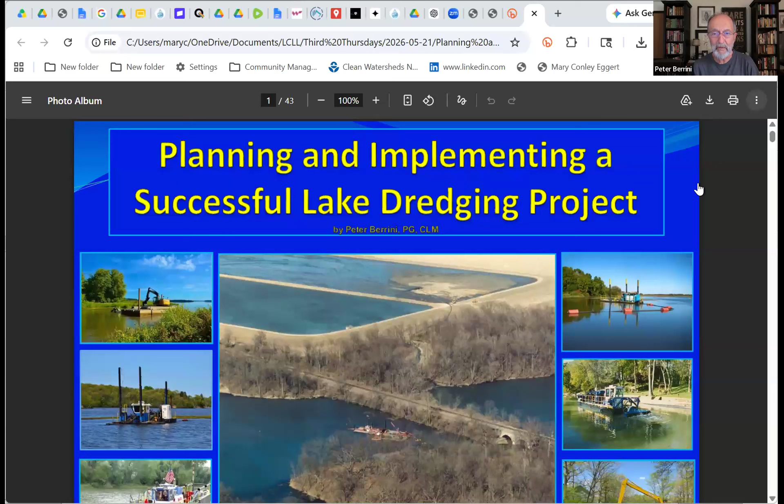This version, planning and implementing a successful lake dredging project, really was—I made a lot of updates for this year's ILMA conference because they agreed to let me speak for an hour instead of the usual half hour.

So I was able to pack more information in, just looking at the various photos. The center picture is from Paris, Illinois. It was a water supply lake—a hugely successful project, and the location of the sediment storage and dewatering facility was absolutely ideal. So everything turned out great.

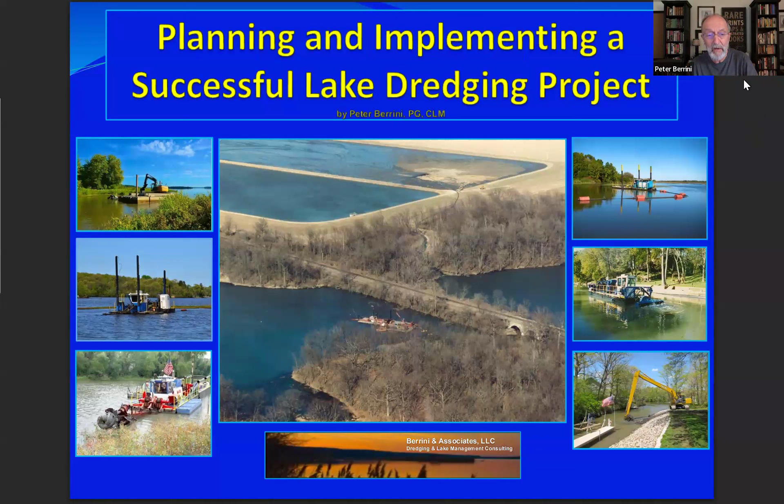There's a couple of examples of different dredges. Go ahead to the next slide.

Trying to breeze through some of this and minimize some of the narrative and text. A lot of this information I have to put qualifiers on—it's not only from lessons learned from involvement in actual projects, but constantly researching any and every situation that could possibly come up, all the way down to the smallest dredging project. Everyone needs specific attention.

Next slide. Sometimes it's easy to tell that dredging is needed. You might see a delta forming, as in the upper right photo. Low water levels might expose all kinds of sediment that you might not have been aware of, other than your boat propeller hitting it. Or you might see very brown, turbid water being agitated by your boat propeller, or an island maybe forming at a creek mouth.

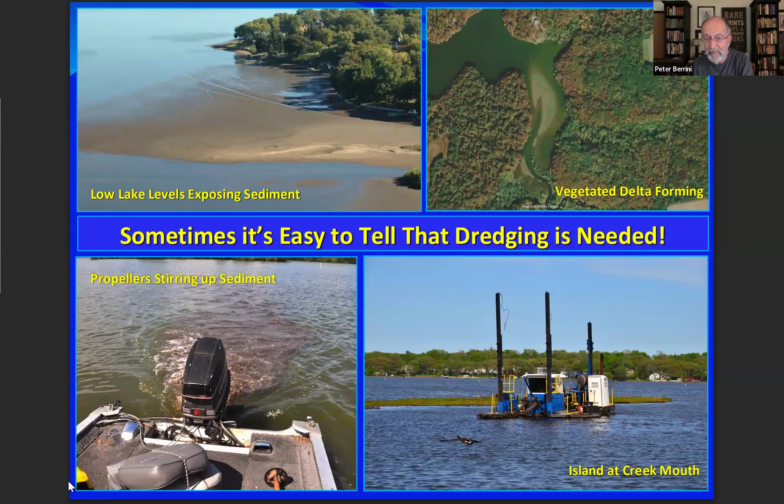Next slide. Those are just the obvious signs. So I felt it was important to create somewhat of a basic flow chart: Hey, we think our lake needs dredging. What do we do now?

You would go through a couple of choices. Let's do a survey so we know what's there—where are the problem areas, what's the sediment like, if we dredge where do we put it, how much will it cost, which is the best method?

Mechanical or hydraulic, which are predictable removal methods, versus—I will talk a little bit about bio-augmentation options in a couple of slides later, but that's not my main focus.

Usually it's for navigation impacts, loss of water depth, which is critical. But what regulatory permits will be required? That's going to be based on what method of dredging you choose. If you hydraulically dredge, you need to approach it a certain way as far as permits go.

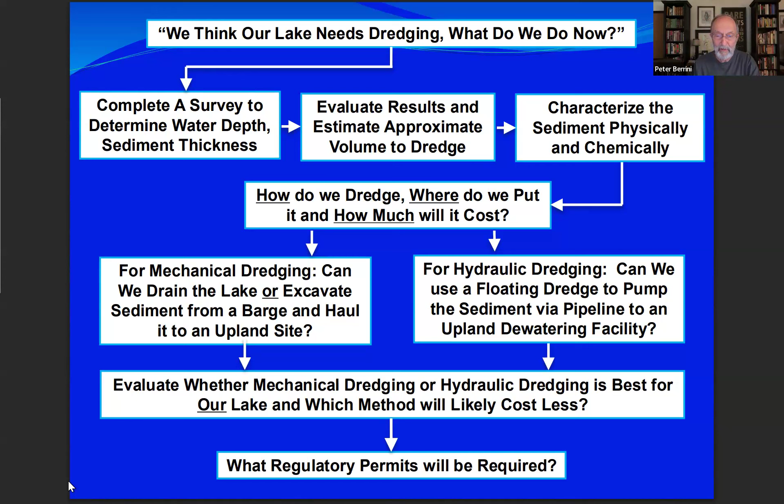So it's very important to gather the right information to make these planning decisions. It's very expensive—we want to do it right, let's make sure we've got the information.

What areas are impaired, in terms of access, water quality, etc.? How much sediment has accumulated? What are the physical and chemical characteristics? We need to sample the cores and analyze them. How many cubic yards, how do we remove it, what method is best, what size and type of equipment is most suitable?

There are so many options out there as far as equipment and methods. Where can we put it? How much is it going to cost? How do we pay? All these questions.

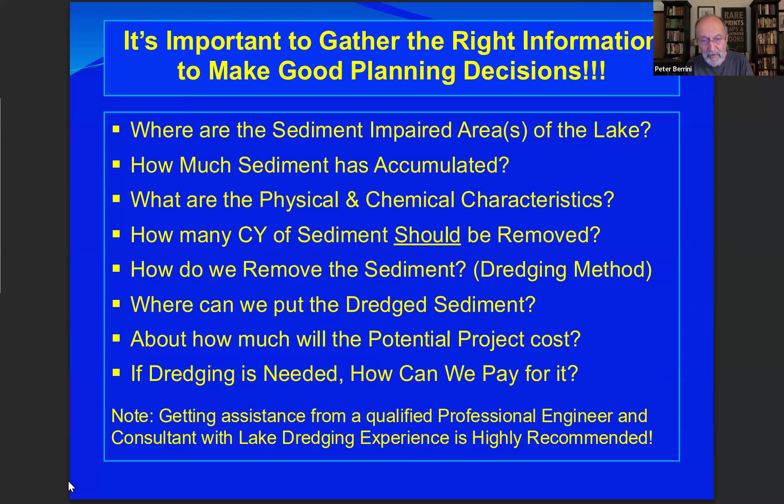In a lot of cases, although I'm not a professional engineer—I'm a geologist—I always had a professional engineer on staff, because certain permits require a PE stamp. Lately, in the last 5 years, I've been more focused on helping a local engineer with a PE to execute the project by giving them proper design and permitting guidance and how they should approach it. It's worked out quite well.

Considerations: once we determine these dredging limits and quantities, and a placement site is secured—and you'll never catch me using the word 'disposal,' other than right now to qualify.

We have to have plan drawings to clearly show a contractor what we want, or a regulatory permitting agency what we propose, and how we're going to comply with environmental regulations.

Bid specifications are hugely important to not only spell out clearly what the contractor is supposed to do, how it's going to be measured, how it's going to be paid for, to eliminate problems during the project as much as possible.

A post-dredge survey is critical. Once you do the pre-dredge survey and you dredge, it's oftentimes very important to do this always, because it's underwater—even though the dredger thinks they've dredged there, they may not have reached the levels that were proposed. So in order to get the quality job with the results you want, you've got to verify it. Next slide.

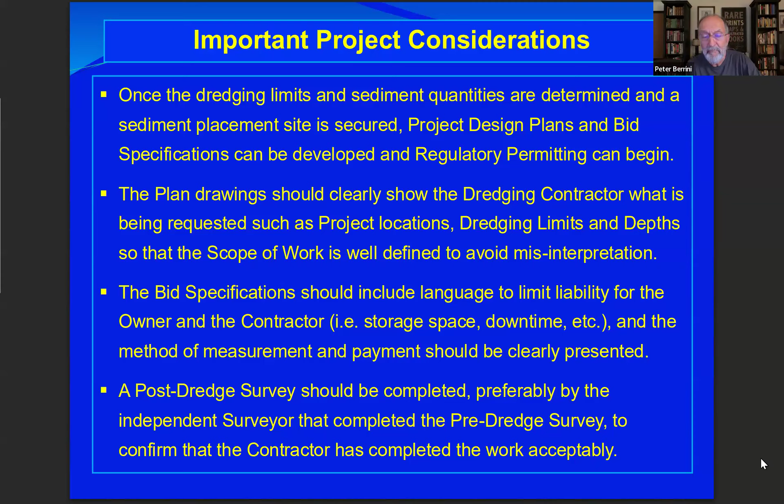And permitting requirements in Illinois are... next slide.

Rather than reading through every one, there's a process of going through the local Corps of Engineers regional office, but copies would always go to Illinois EPA and Illinois DNR. It's the Corps who determines whether a permit is needed, and what type.

If it's a hydraulic dredging project, there would be effluent water returning, and right away you need a specific EPA permit. If you need to store the sediment in an earthen impoundment, it could be a permitted dam, so an Illinois DNR dam permit may be required.

If you need, for instance, an NPDES permit because you're disturbing more than 1 acre of upland ground to put the sediment, here's another case where a PE, professional engineer, is required.

Although I'm not actively bidding projects, I do construction monitoring by helping various engineering firms, some located in northeastern Illinois, et cetera, and Wisconsin. It's been very helpful for them to avoid pitfalls they're not familiar with. So that's been a good thing.

It's limited how much time I have to spend, and it helps to make a successful project. But in many cases a professional engineer is needed, and many are not necessarily very savvy with dredging. Certain firms are, and many more are getting familiar.

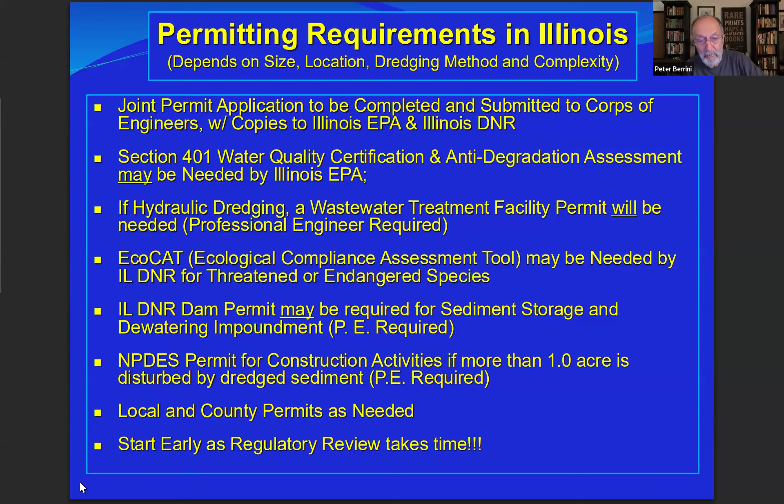Start early, because the regulatory process can really be time consuming and take longer than you would hope.

Some of the benefits: you could get increased water depths and storage capacity that's lost to sediment deposition. You can improve and expand your recreational opportunities, safe boating and navigational access. You can also expand and improve your aquatic habitat conditions for fish and other aquatic life.

Improved water clarity and quality can occur also from reduced internal sediment and nutrient recycling from physical resuspension, which pulses phosphorus back into the water column.

If you had an extreme storm event, like we've had many of this spring, at least down here and up north, that can really agitate the bottom sediment and resuspend and remobilize phosphorus. So dredging can really help to reduce that.

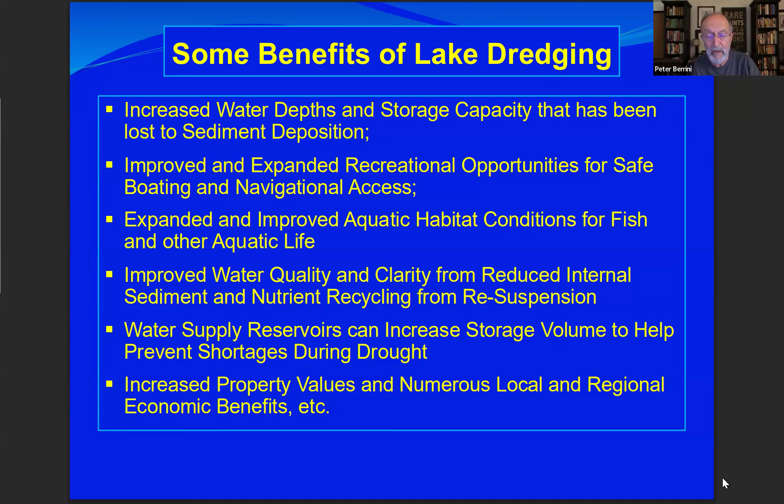For water supply reservoirs, it can be critical to increase the storage volume to prevent shortages during a drought, for instance. This has been proven by a really great study done at Delavan Lake in Wisconsin, which I've done work with for almost 20 years now. They've found increased property values and local and regional economic benefits, et cetera, as a result of a properly implemented project.

A sedimentation survey is absolutely critical. Beyond just getting a hydrographic or bathymetric survey, which only tells you the water depths, it's critical to know not only how deep the water is, but how thick the bottom sediment is.

As you see in this example, I like the more transects the better, the more points where you measure depth, the better. The more closely those point intervals are, the greater the accuracy. The bottom line is, if you need to assess the lake, going across it in a series of strategically located lines or transects can show you that at this location it's, say, 8.8 feet.

And the hard bottom underneath the soft sediment is 10.6 feet. If you had 2 feet of sediment in a very shallow portion of the lake, only 1 or 2 feet deep, that 2 feet of sediment has a much greater impact on your access and water quality conditions. So it's very important to know not only how deep the water is, but how thick the sediment is.

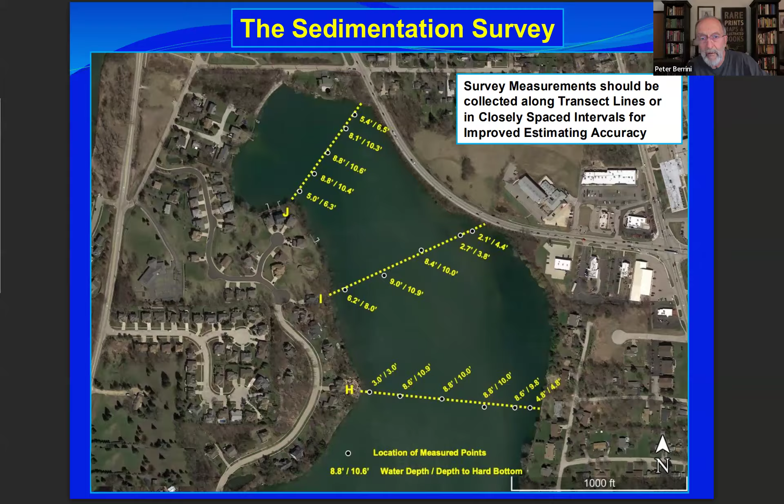Another version that a different company has done, which I really like: you can view different contour lines showing existing water depth down to the top of the sediment, and different colors and numbers showing sediment thickness. In this example, there's an area that's orange with lots of sediment - it may have been a deeper hole where sediment collected. Overall, it gives you an idea of how the sediment is distributed.

If I'm in water shallower than 8 feet, I start to take a closer look. If I see 2 or 3 feet of sediment widespread in an area less than 5 feet deep, that raises flags, and I focus on those as priority areas to attend to most prominently. That's why these sediment surveys are so important.

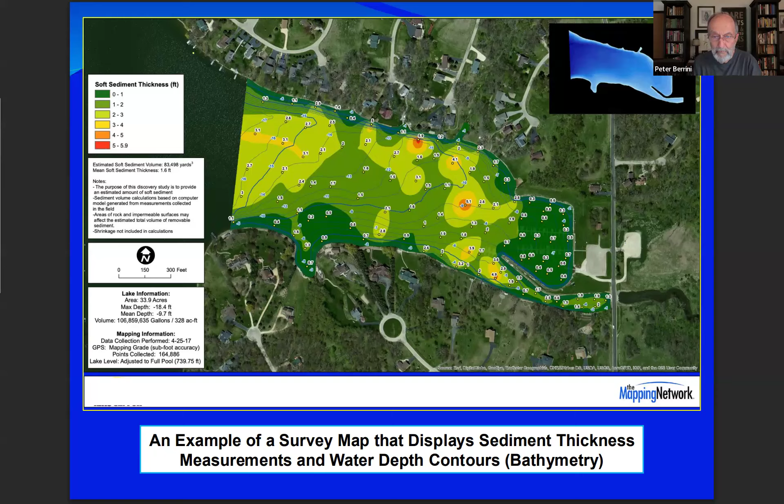Same one. Let's see, there you go. And there's different measuring tools.

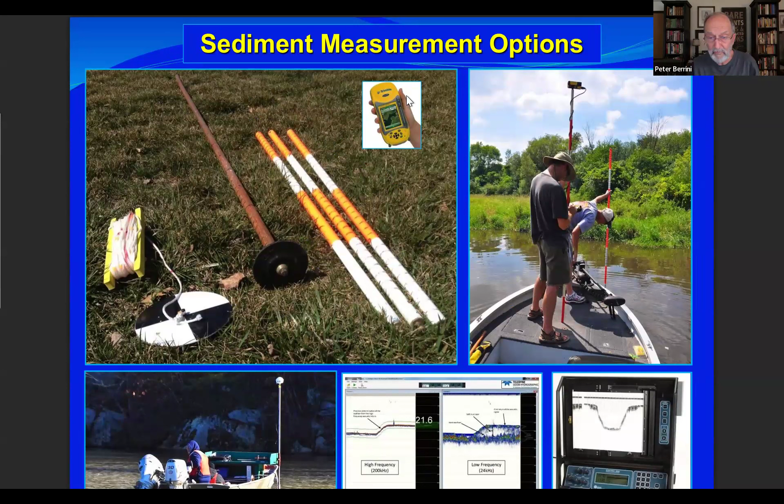I've always found a pole that you could push, that had markings, useful to push down through the sediment. I love having a pole with a disc at the end because it gives a much more accurate measurement. Oftentimes in lakes, I'll throw out there, such as Butler Lake, which has very loose, organically enriched sediment, a simple pole with no disc at the end makes it very difficult to get an accurate measurement because you can't feel the sediment in the upper 6 inches until you get some gradual resistance.

There are other methods. Obviously you've got to use a GPS system. Boats who do this regularly could be using a calibrated sonar unit that tells them depth, but it's ultra critical, in my opinion, to calibrate those measurements by pushing a pole down through the soft sediment. There are areas in Lake County where there's peat at the bottom and a pole may not hit a hard bottom, and then you have to decide what's best for that situation, like targeting a maximum dredging cut depth, for instance. But using GPS, whether handheld in a boat or running lines back and forth, can easily give you water depth or bathymetry.

Dual frequency fathometers have made claims. I've tried to use them and had very mixed results. It's very important, I think, to take at least some measurements using a pole that has markings, so when you push it down and feel a hard bottom, you record that measurement and can know how deep it is and how much sediment is there. The easy way out using this dual frequency method has not panned out, in my opinion. It's very inaccurate. I really think you've got to measure, and in most cases you're not having to do this in water greater than 10 feet deep because it's not really as much of a problem worth getting stressed out over.

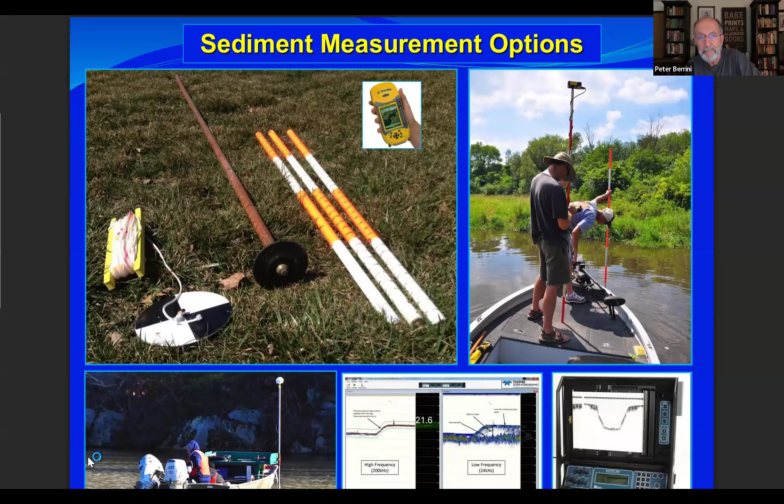So a cross section, back up. Next, this is just one slide. These are typical lake sections. When you measure these points going across the lake back and forth, you can target a transect and create this profile view, this cross-sectional view.

It's extremely important because not only does it allow easy calculation of volumes, but it visually can show the non-scientist lake person how the sediment might be impacting them. If you look at this bottom section, for instance, the hard bottom is just barely 6 feet deep, and there's 2 to 3 feet of sediment. So the existing water depth in this case is only 2 or 3 feet deep. So that 2 or 3 feet of sediment in relation to the top, which is 9 feet deep, is not maybe quite as great. And dredging is expensive per cubic yard.

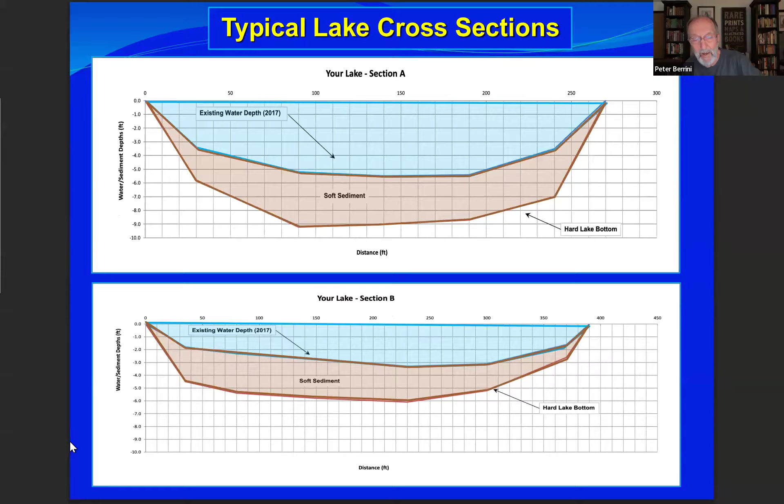That's why it's ultra critical to know this: where should I prioritize my dredging areas, depths, and limits? So the cross section to me is like a must, it's like the Bible of dredging. Go on, next slide. Sorry, there's a slight delay here. Yeah, these are basic slides, I can talk about them if anyone asks.

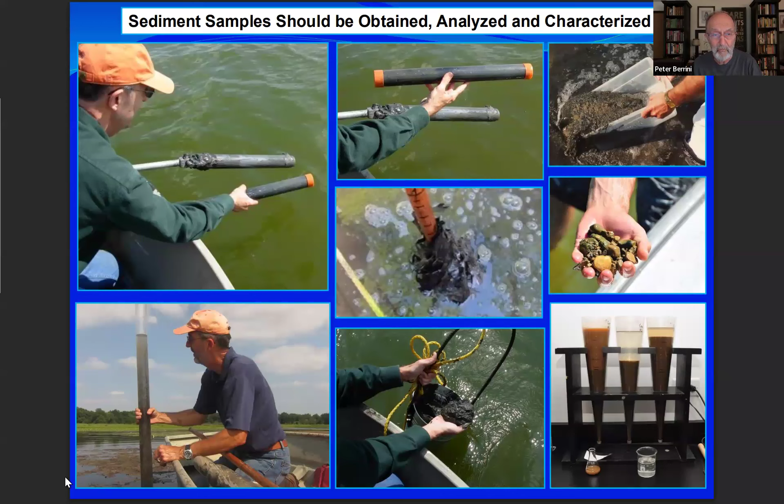Core samples, sediment samples, I think are extremely important, not just because Illinois EPA will likely require some if they are cognizant enough to read your permit. They're not known to be very quick, but they do have specific requirements. A core sampler that you push down into the sediment allows the sediment to be put into a tube, which you can see my right hand holding in the upper left-hand side. You can immediately cap it, put it in a cooler, ready to be sent to the lab. If you're hydraulic dredging, you would also be getting gallons of lake water because you have to mix it at a certain ratio and analyze it according to certain procedures.

But as you can see, there's different types of sediment. The upper right-hand column was from Third Lake, and that was primarily an algae biomass so thick from top to bottom, as much as 3 to 4 feet, very watery, 95% water, and it was hydraulically dredged, versus the slide below it, from Wonder Lake, where there was a lot of gravel and cobble present, which can be a real problem for the dredging depending on the method. The middle one, leaves may be a huge problem. Sediment may be super fine grained, which will cause the sediment to settle more slowly.

So it's very important to understand not just the chemical characteristics, like is it high in lead, for instance, or are there pesticides or PCBs? In most cases, no, but the physical characterization, in my opinion, is extremely critical in terms of meeting your permit requirements, knowing how to approach it, and designing your dredging methods, storage methods, and dewatering facility configurations. Next slide.

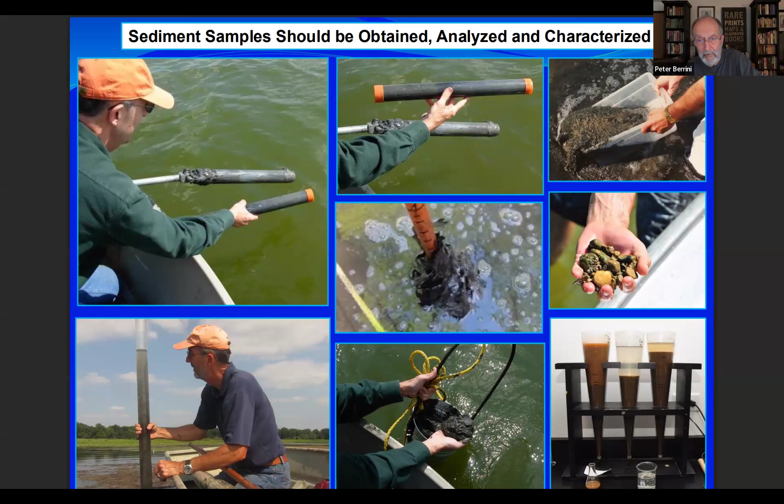Generally, I don't get to say this much about sediment, but it's extremely important in the planning process. This was actually pretty rapid.

The time span—if you mix sediment and water up, as EPA requires, 1 part sediment to 4 parts lake water, to simulate hydraulic dredging and discharge into a dewatering facility, not necessarily geotextile tubes, and then you measure the amount of time it takes to have most of the solids settle out. And if it doesn't settle out almost completely after 24 hours, you're probably going to have to use some type of flocculant to make the suspended particles settle out more quickly.

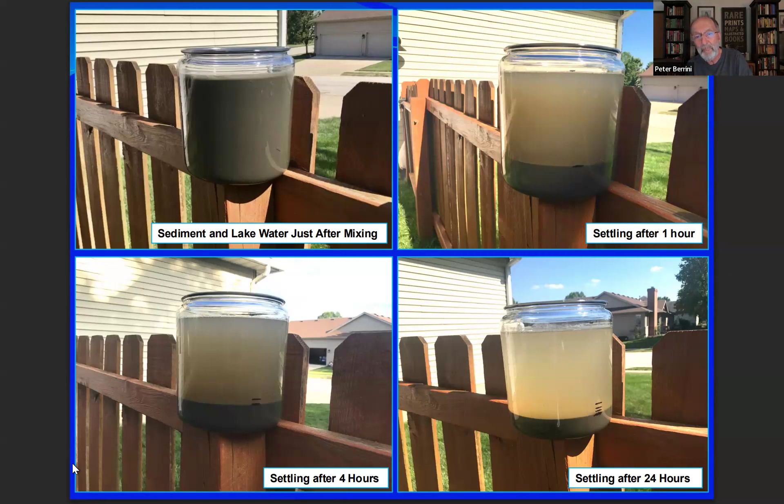So this is another part of the dredging Bible of permitting and design.

Obviously, if it's all sand, it's going to settle very quickly, and that makes life easier. But typically it's not—it's usually organically enriched with leaves and plant detritus, or silt and very fine-grained particles, so settling doesn't occur quickly.

Up in Lake County, space is at a premium. There's very little open space to store and dewater sediment in an open earthen impoundment, for instance, although I've had many up there that have worked out quite well. One of which, Third Lake, was on Forest Preserve property, which has since been graded back over and turned back into ecologically important habitat.

So if you have a large enough project, you may have to try and identify and secure an adequate upland storage location—a parcel of land that optimally would allow water to drain back to the lake, so that you're not just draining the lake and letting the water flow away somewhere else. It's best to have the water be able to return to the lake just by gravity flow.

Sometimes you have to create a map like this and investigate what possibilities are there before you even go and talk to the landowner about whether you could lease this land for 3 years, or whether it could be purchased, et cetera. In this particular case, the big rectangle in the upper right-hand side—the landowner agreed to allow them to use the land and restore it later.

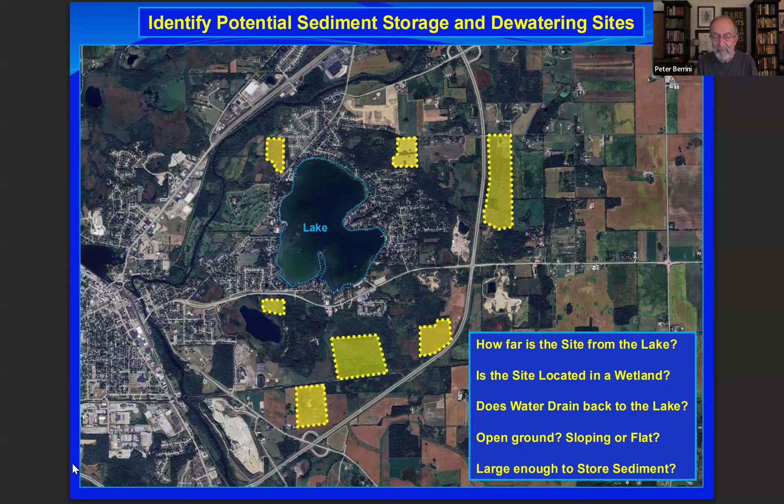So how far is it? How high is it? Is there a wetland on site? Does water drain back? All these criteria go into selecting the proper site to store all of your dredged material.

This is if it's a larger, more complex project, and you're trying to really evaluate each potential site—how far it is, how high it is. The further it is and the higher it is, like Wonder Lake in McHenry County, there were at least two booster pumps used on that project.

We had to pump sediment from the furthest location, up 95 feet higher than the lake, a distance of up to 3 miles. So you can get extreme—it was a pretty good sized project, 500,000 cubic yards total. There are pictures within here that show that from an aerial view, but it's just an example.

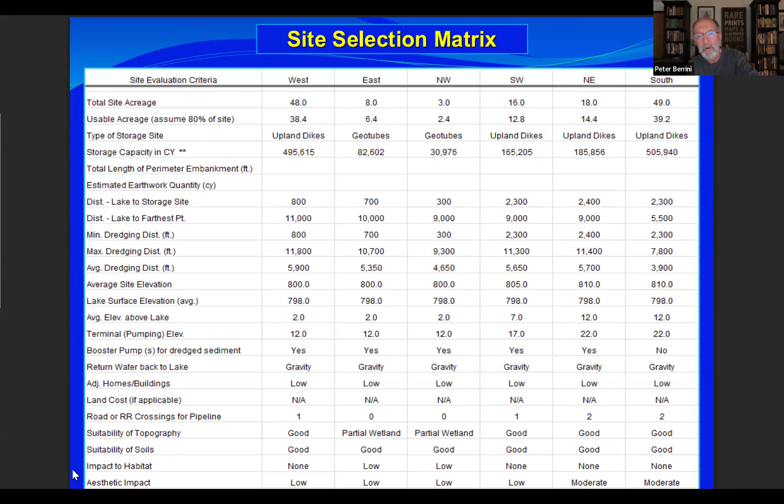This type of matrix can help in the planning. For a smaller project, probably not so critical. You're probably going to be really lucky to get a large enough piece of land to store the sediment on, and you may be forced into using geotextile tubes, which can use a smaller space.

Or, one project I had in Delavan, Wisconsin, there was literally no space, and we used the back of a fire station with what's called mechanical dewatering, using belt presses and centrifuges. So you're actively creating soil that could be hauled away on a daily basis, and that's a more expensive process. But when you don't have any land, like in Lake County, which is highly populated, open land is not readily available all the time.

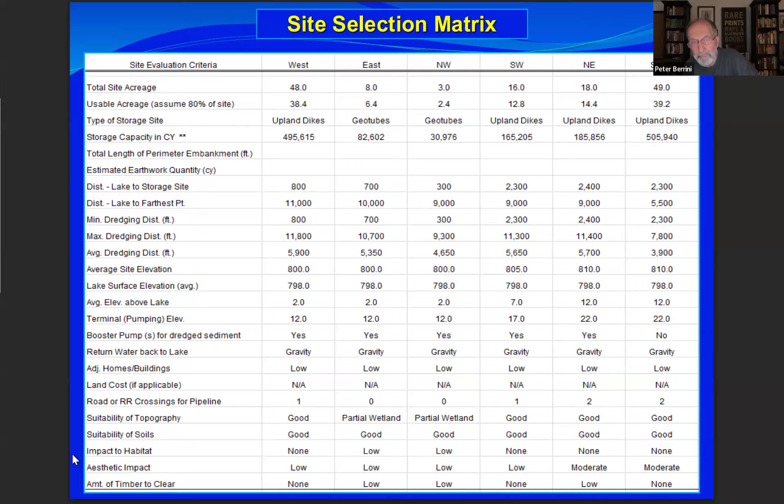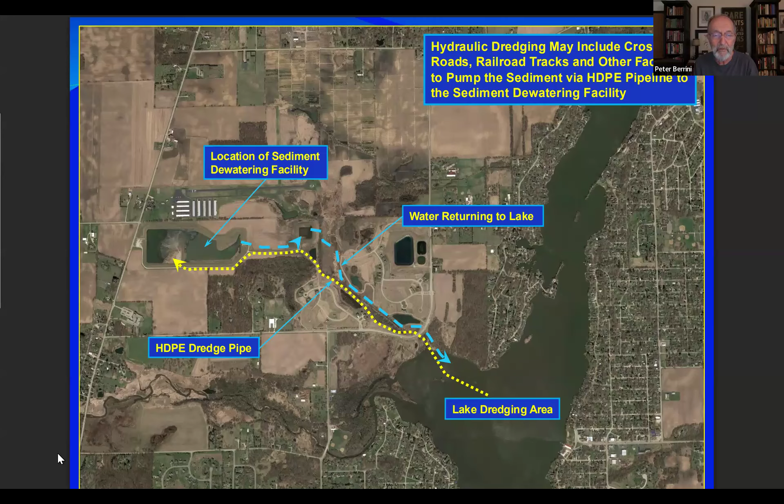So you've got to pump that sediment and water slurry all the way up and cross different obstacles like a road or a culvert. It had to go by various things to get there. And then the water would drain back to the lake, in the blue. That has to be sampled, and it has to be compliant with Illinois EPA regulations.

15 milligrams per liter of total suspended solids is what's required. You can cross railroad tracks, you might have to cross roads. At Butler Lake, that was the case. We had to cross through a railroad underpass, bike paths, etc. So you have to deal with this and look at the distance.

The distance and elevation you're pumping to will also dictate what type of dredge and how many booster pumps might be required, versus something a really good local firm uses, a very small dredge that might pump hundreds of feet into a geotextile tube for a small project. That's a different consideration. You could only pump so far, so 10 feet high and 1,000 feet far maybe, but anything further would be limiting for a 6-inch dredge, a Dino 6, or even a Truxor, very low, small cubic yards, maybe hundreds of cubic yards.

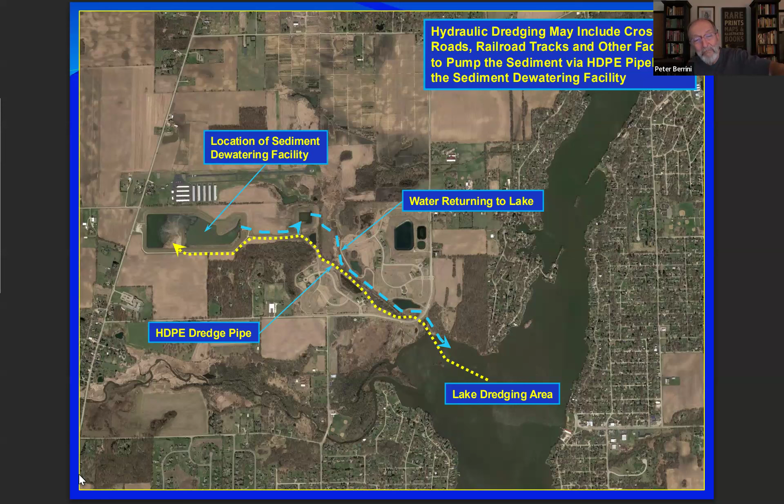This was 500,000, so you could use a larger dredge, and you needed that larger dredge to get it all that distance and all up that high.

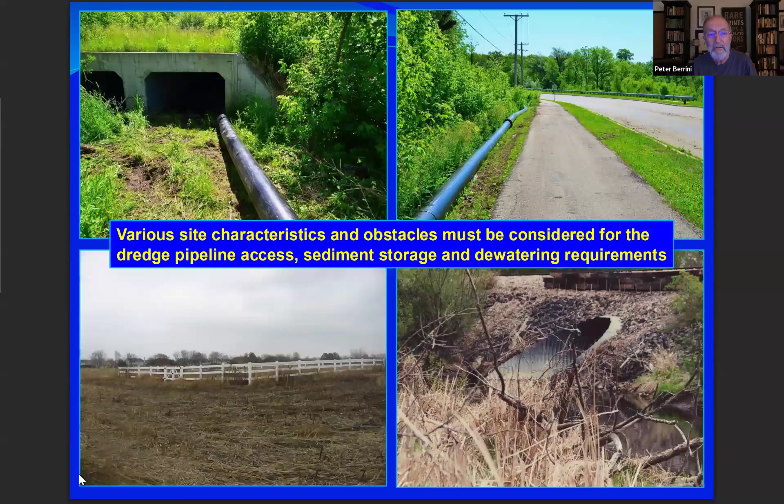You just have to consider all these things, and as an engineer, they're typically used to that, but they must be aware of it. In a way, I was also heavily targeting this PowerPoint - if an engineer who had never worked on a dredging project before was to undertake it, it would give them some more insight into how to avoid screwing up on the first project.

There's different methodologies and sizes. There might be hydraulic dredging using a larger rotating cutter head for much bigger projects, like Wonder Lake, for instance. For a smaller project where you're just dredging soft silt, you could use a horizontal auger dredge. It's like a snow blower or snow thrower working underwater, which could produce lower turbidity for very small projects.

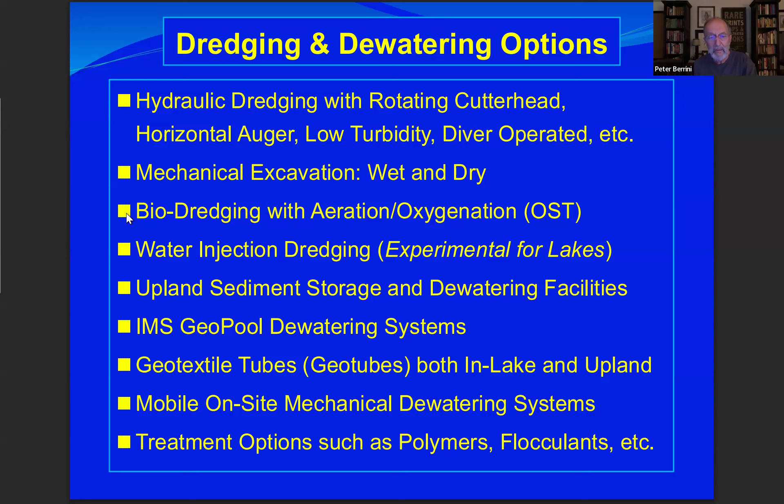Go ahead on the next slide. Different types of hydraulic dredges with rotating basket type cutter heads. Next slide.

There's auger dredges, horizontal. There are swinging ladder dredges for long, narrow canals, channels, etc.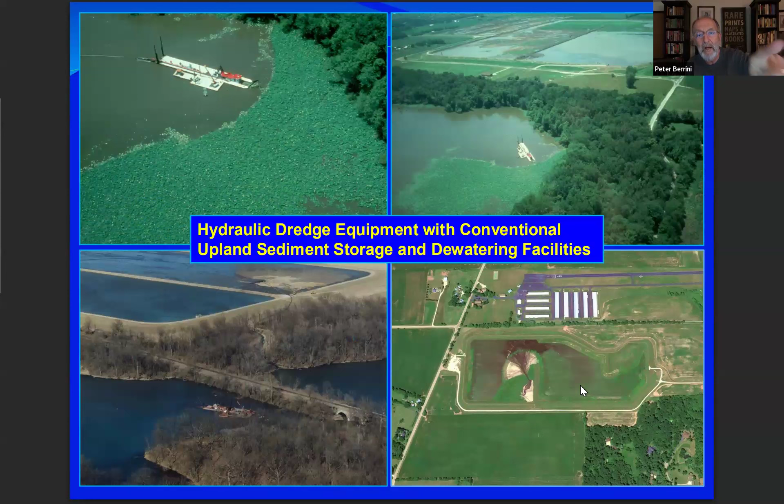So this is hydraulic dredging with conventional dewatering facilities. Lower right was the Wonder Lake project I mentioned. Upper left was Lake Springfield, and upper right shows how the large dredge swings back and forth as it cuts, with the dewatering impoundment in the background.

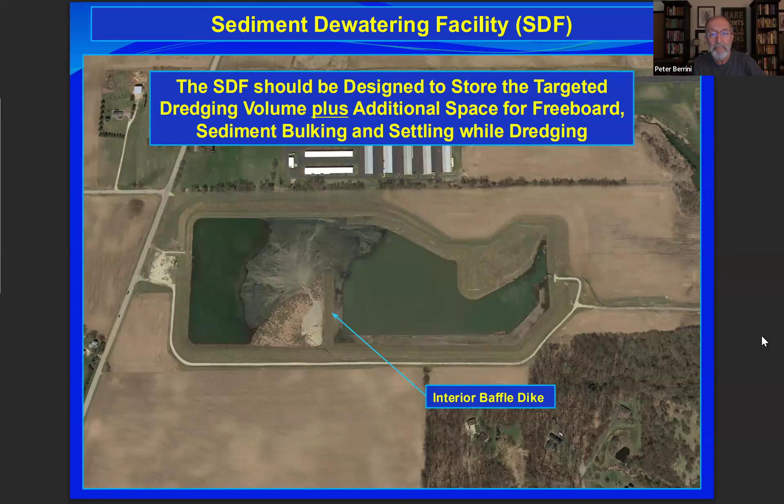Let's see if we can go through this. The sediment dewatering facility should be designed to store the targeted dredging volume, plus additional space for freeboard, sediment bulking, and settling while dredging.

That's an example of another SD facility, actually in Lake County for the Fox Waterway Agency. They periodically clean out the cells and haul the material over, screen it, and have been able to sell it as topsoil for about $200 a truckload. So periodically this is cleaned out so they can reuse it and refill it.

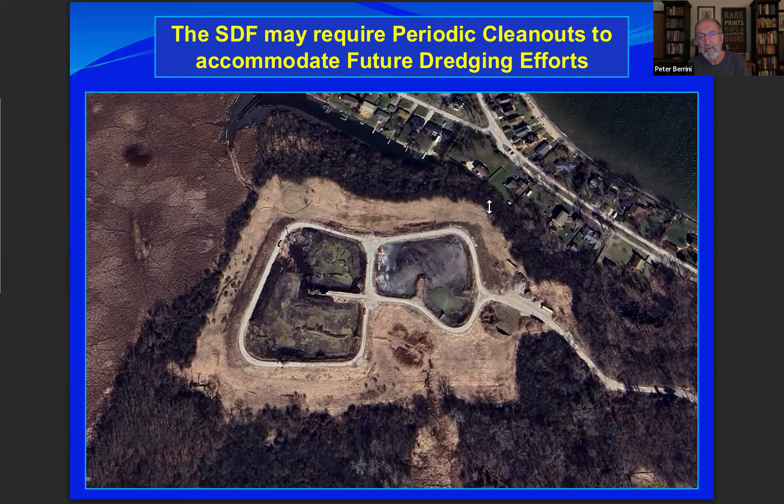Very important if you're going to have to continue doing it periodically.

Hydraulic dredge mobilization is a huge endeavor. It's a big dredge, it needs a large crane to deploy it. You've got a fused pipeline, thousands and thousands of feet. You can see the crane dropping the dredge in, which may be needed for a larger dredge, larger project. Smaller projects, you can launch them off of trailers.

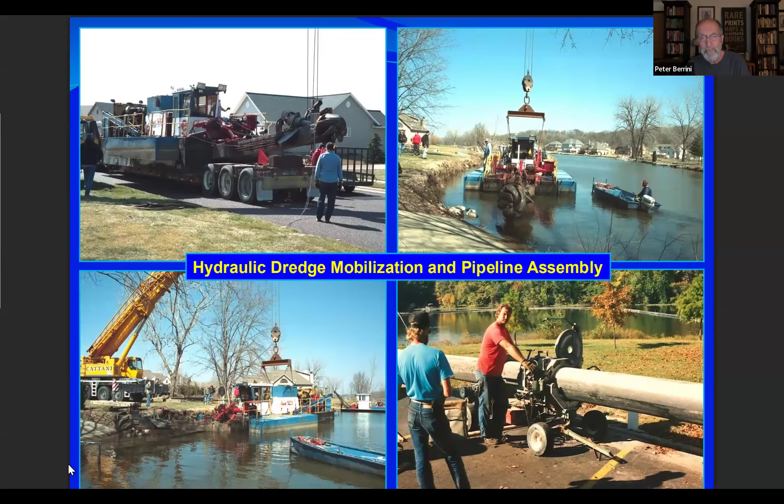Hydraulic dredge discharges and water control structures. You can see how it's dark and thick. Upper left, Wonder Lake, has a nice rich thickness of sediment mixed with water. It's a slurry, typically about 15% solids, the rest is water. So you use these water control structures to raise and lower the water levels, to retain the water so it settles properly and you can maintain space and operate efficiently.

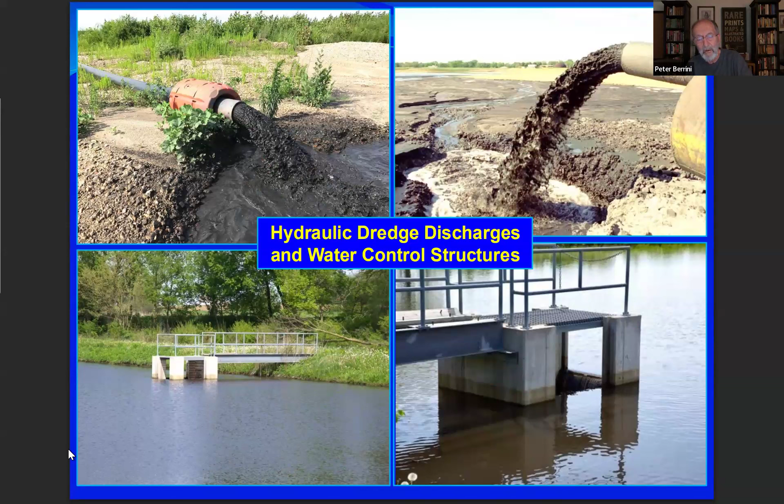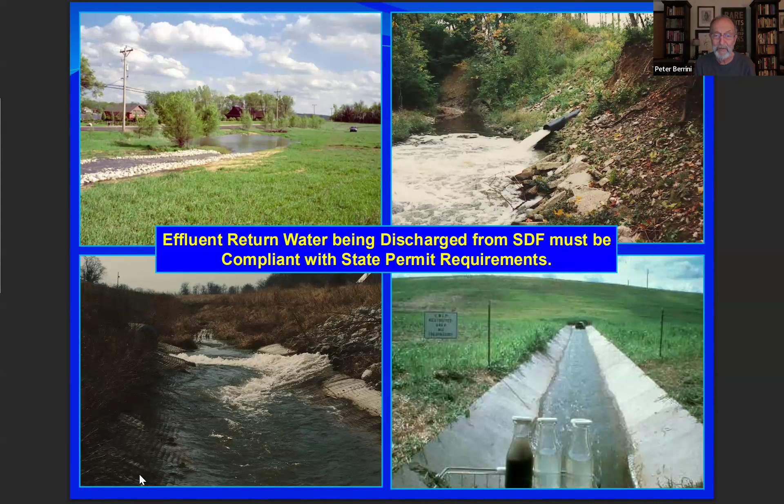The effluent water, you can see on the lower right, has to return to the lake somehow, and you may have to control that water so it's not eroding the channel it's dropping into. On the lower right, you can see how it's clear versus mixed with sediment. You're trying to achieve a clear effluent, and if it's clear you might be in compliance, but you take samples to confirm whether it is or not, and you send them to Illinois EPA every month.

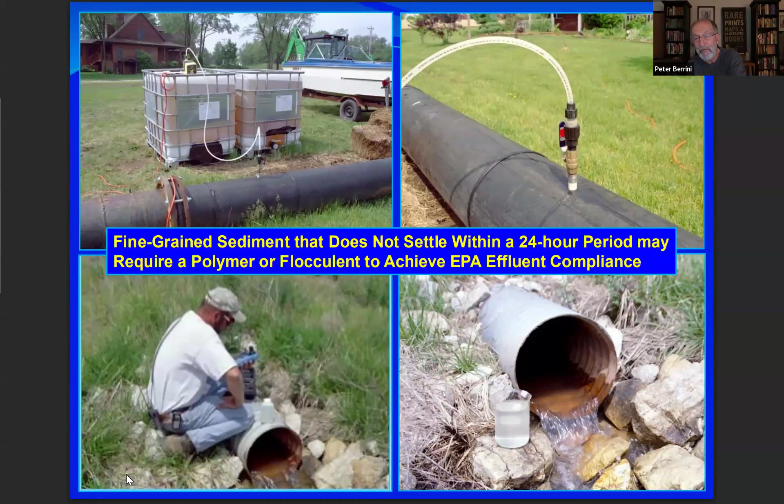Polymers or flocculants might be needed, shown in the upper left. You can inject it into the pipeline, it mixes, and by the time it discharges into the dewatering facility you can get fairly clear water as shown in the lower right. But it may be needed because if you don't achieve EPA effluent compliance, you're probably going to have to stop the project or face a fine. So you've got to do what's needed.

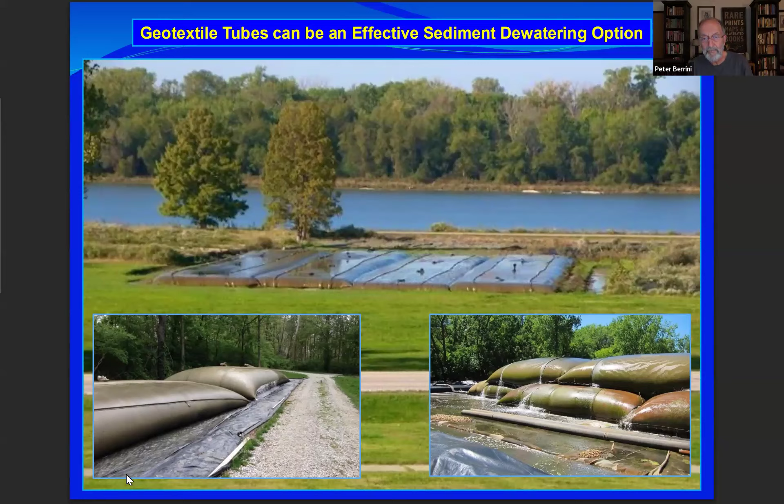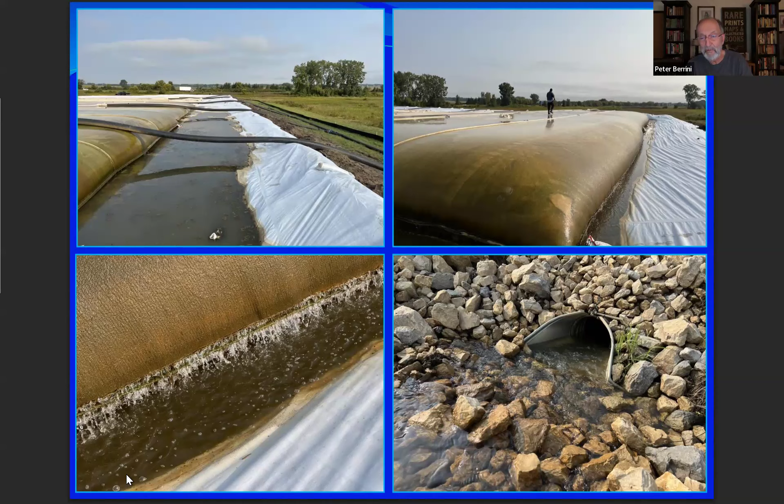Here's another example of geotextile tubes. You may have to have a series of inlet pipes so you can selectively pump into tubes. You have to have nice clear water coming out, but your sample would be taken from the lower right, for instance, after you've matched the appropriate polymer. You're getting gin clear water, you take this sample, send it in, and hope you're in compliance. But essentially, the permit says you've got to meet these conditions.

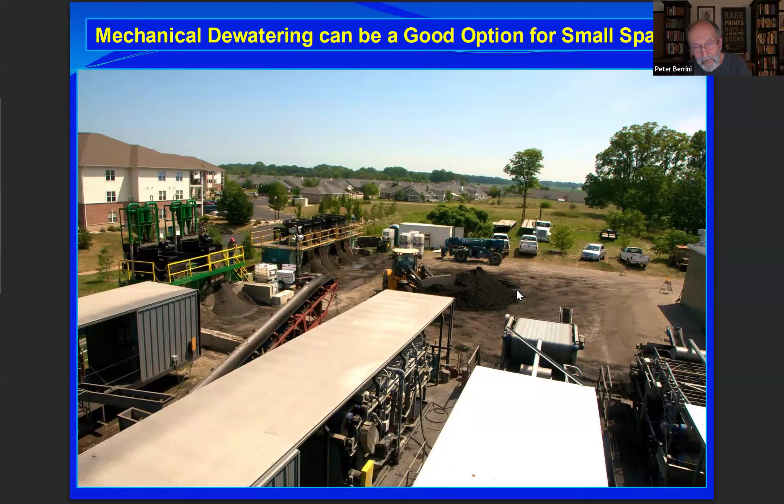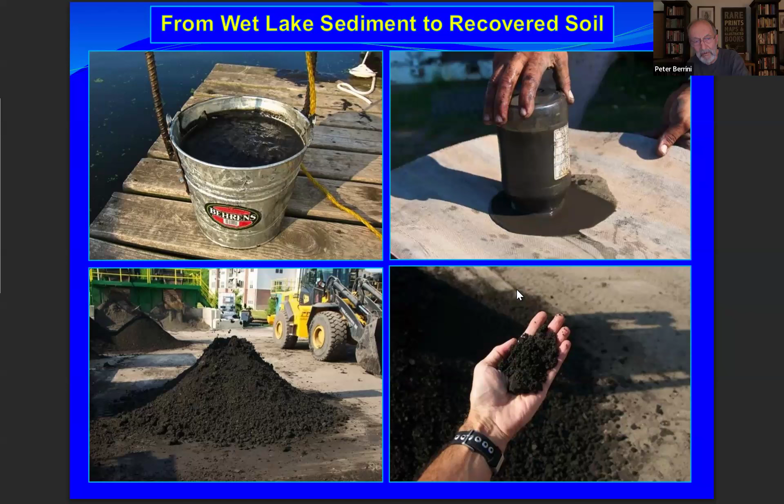Mechanical dewatering is what I mentioned, if you don't have the space to even lay out enough geotextile tubes, never mind build a dewatering pond. Here's a series of clarifiers and belt presses, and even coarse material separators, because there's all kinds of branches and plants and stuff you need to take out. So essentially you're building up in the center a nice soil stockpile, and every day during this project trucks would come and fill up with this nice soil, which is shrunk in volume by 40%. So you're hauling a lot less volume, and hauling costs money. As you can see, it goes from wet sediment down to nice, rich, stockpiled soil. At the time, that was fairly expensive, but hey, it got the job done.

These are just some of the components for coarse material. Sand is taken out with the hydrocyclone, used where you have sediment with different grain sizes and material.

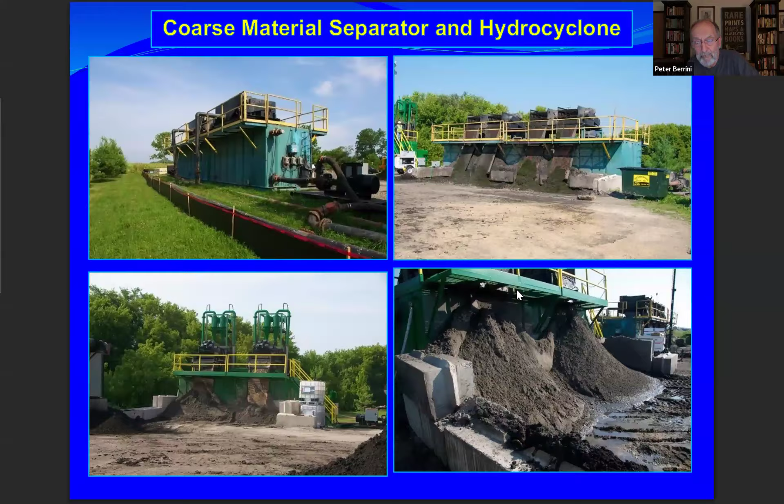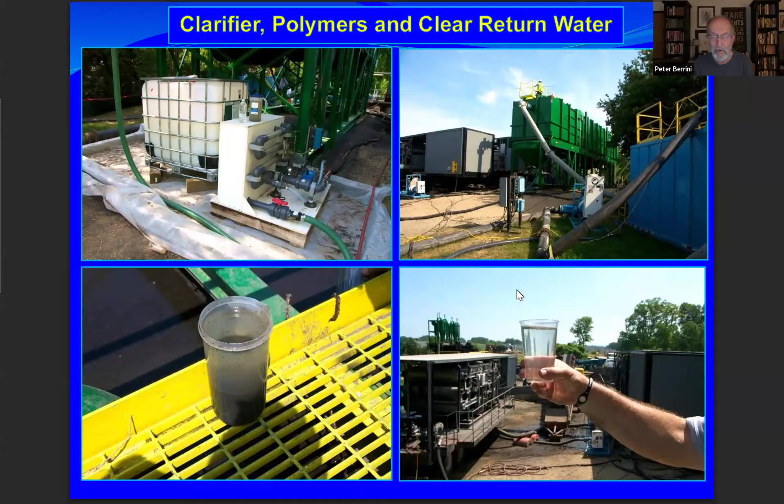This is just more examples of the mechanical dewatering system. Ultimately, Wisconsin DNR oversaw this in Delavan, Wisconsin. Gin clear water is a good sign, and they were happy to see that. Great project. Here's more soil being put into trucks and hauled to a nearby facility that the landowner allowed use.

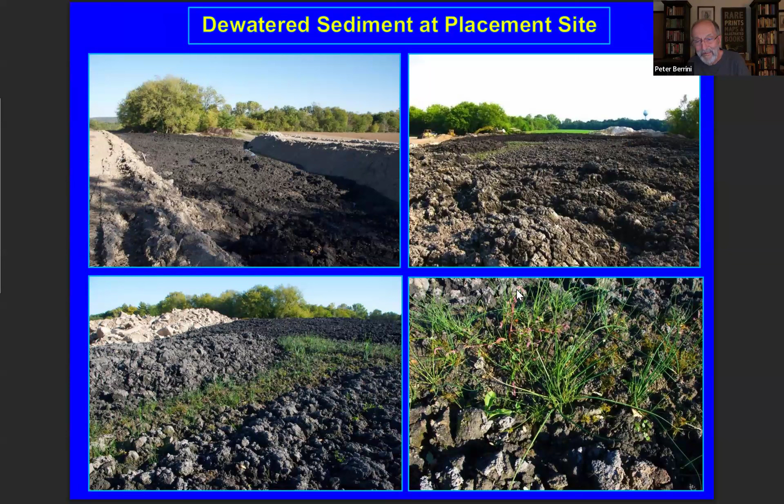Dewatered sediment at the placement site. You're getting various hydric soil species growing, like bulrushes, embedded into the seed bed. It quickly grew within a week.

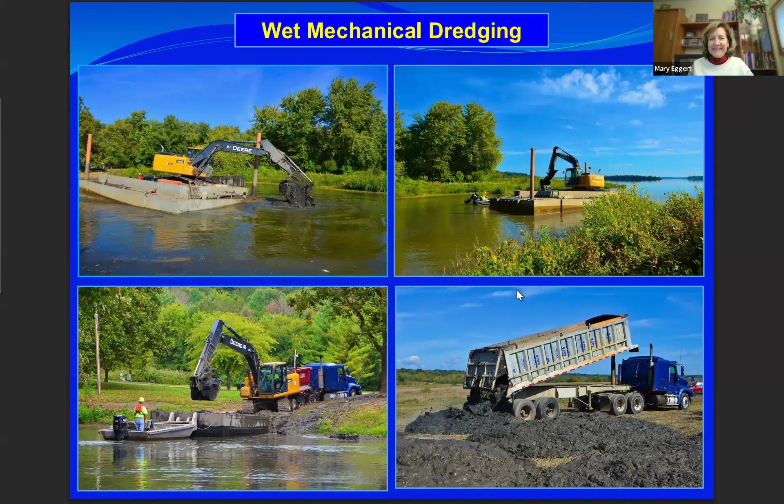Wet mechanical dredging from a barge scoops the sediment, puts it into a hopper barge, offloads it at shore, and dumps it onto a flat site, hopefully surrounded by a perimeter berm, into 20-foot diameter cow pies. Illinois DNR then graded that material to a nice even thickness and planted sunflowers, and they grew like crazy. So it's a plot for hunting and wildlife feed.

Turbidity curtains are typically required around the dredging area to contain any resuspended turbidity.

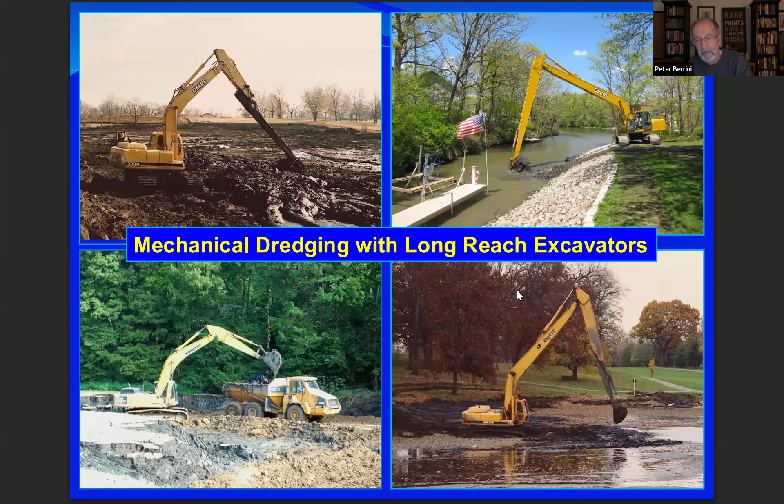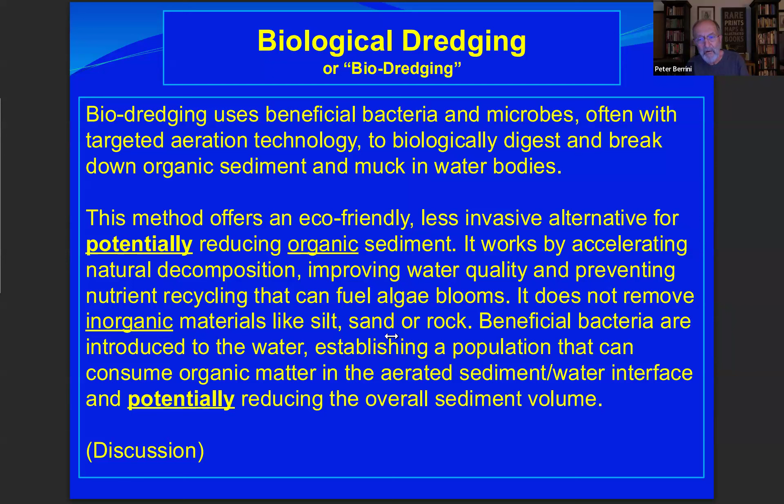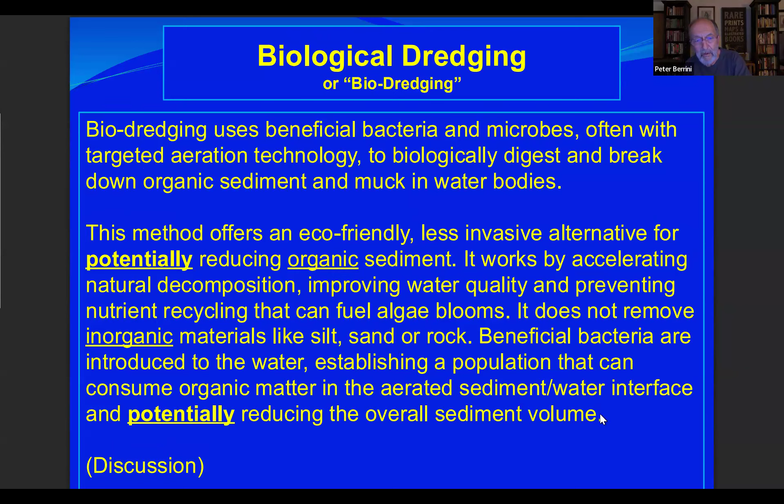I think there are more potential uses for this in highly organically enriched lakes. It does not break down inorganic material, but it presumably can function more effectively on organic sediment. In organically enriched lakes, where you might have 20% organic content, you could potentially reduce sediment thickness by a number of inches. It's not going to make sand or silt go away inorganically.

Different researchers have had much different results. Typically, from what I've observed, using appropriate laminar flow aeration in conjunction with the bacteria and enzymes works best.

But if you have a lake with low organic content, like most Illinois lakes do—Butler Lake is pretty high in organic content—you might gain potentially 6 inches through either self-consolidation or material transformation. That 6-inch gain in a shallow, plant-enriched littoral zone, like Butler Lake, could be a relatively great improvement if it's only 2 feet deep. You follow me?

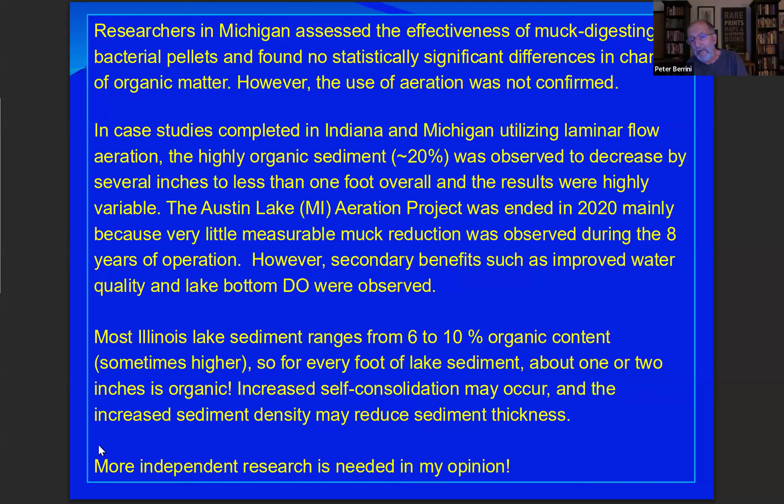But if you've got sediment with only 6 to 10% organic content, that inorganic portion is most of the sediment, and you're going to be limited by that. Now, self-consolidation, I think, is probably occurring, and I think that needs to be studied more. But if you can gain anywhere from 2 to 4 to 8 inches of depth, it could be meaningful in a very shallow area. That's where I see greater potential.

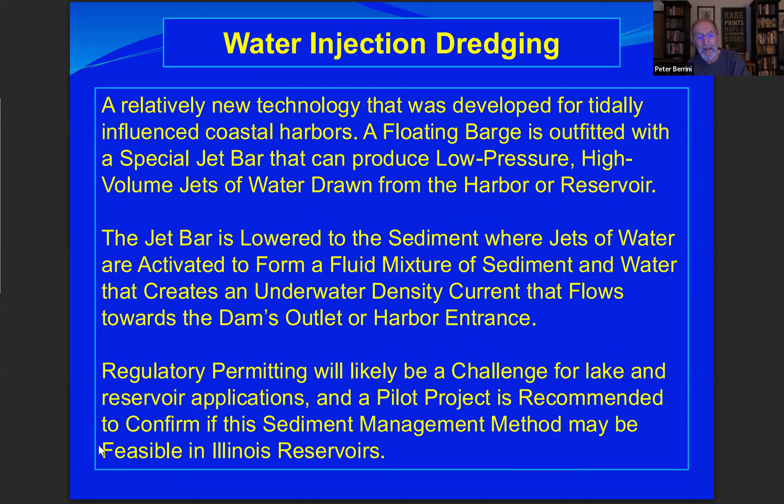Water injection dredging is still not allowed in Illinois, but I think it has its place. Read the slide later, I don't want to spend much time on it.

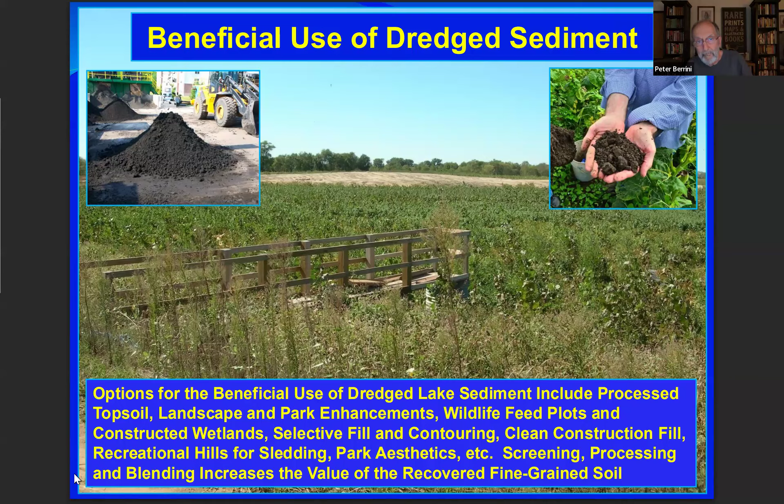A strategically planned and properly implemented lake dredging project can provide many long-term benefits, especially when soil erosion is controlled in the surrounding watershed.